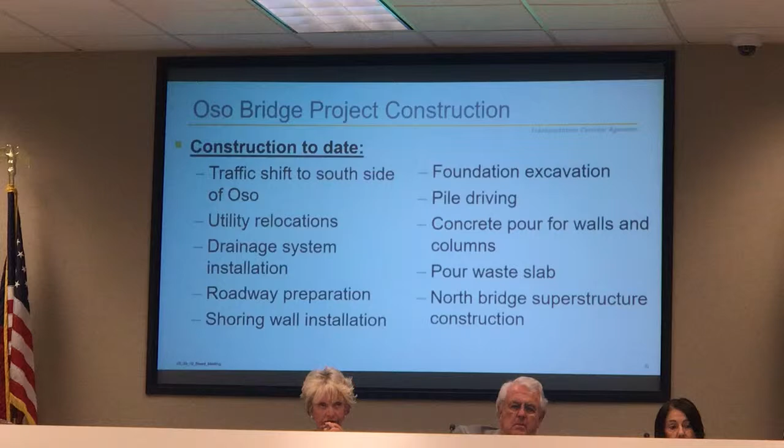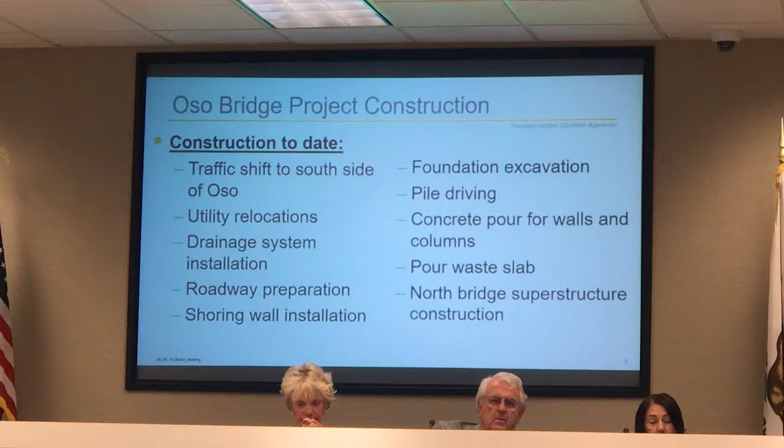Construction of the Oso Bridge project began August 1st, 2018. Since the August start date, 160 working days have transpired, resulting in 40% of the project being completed. Even though there have been 23 unworkable days due to the heavy rains this winter, the project is still 12 days ahead of schedule. Now let's look at some of the construction activities that have occurred to date.

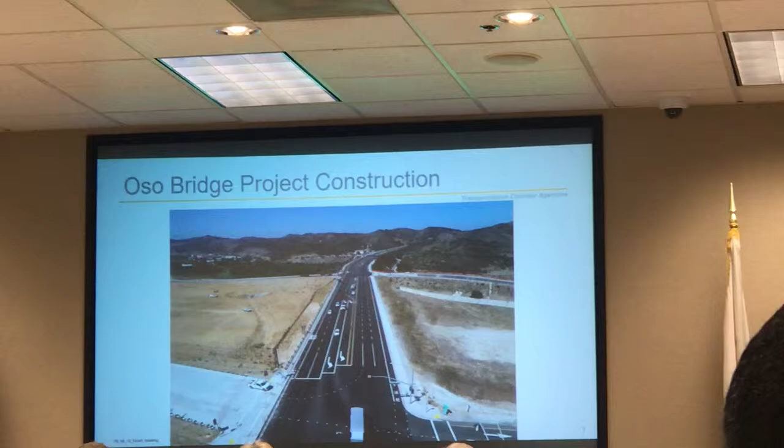The first order of business when we started this project was getting the traffic shifted to the south side of Oso Parkway. This is a view of Oso looking to the west before construction began. Look at that south side, or basically the left side of the slide, to see what occurred here.

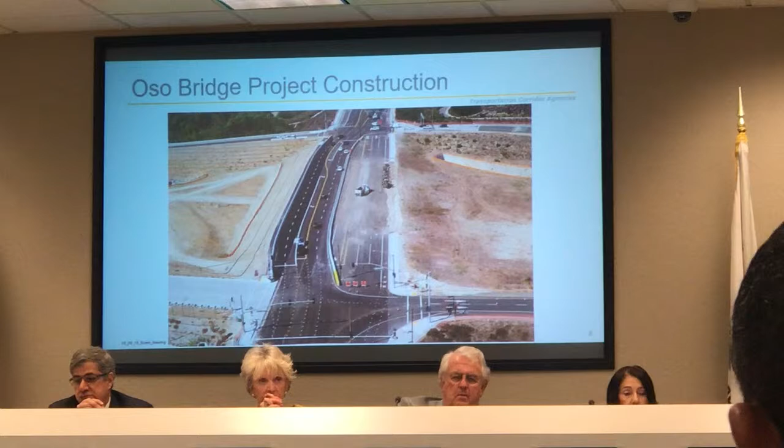To allow the traffic to be shifted, you can see where my arrow is here. Additional fill was placed on this side of the road, which allowed for 2 more lanes to be constructed on the south side. That allowed for all the traffic that was on the north side to be put on the south side here, which then provides the area to build the first half of the bridge on the north side.

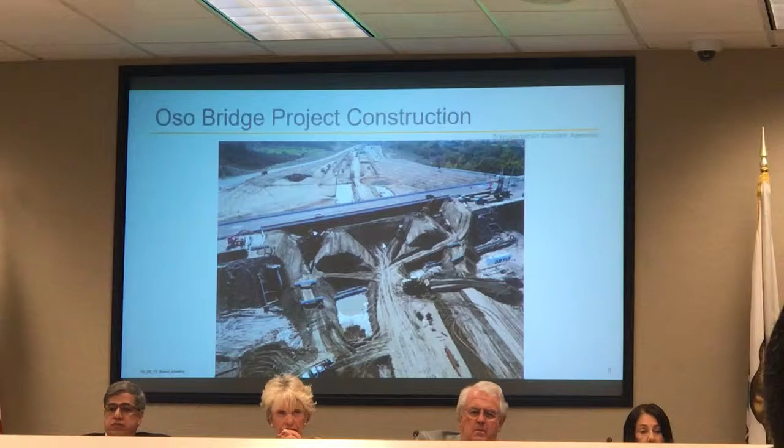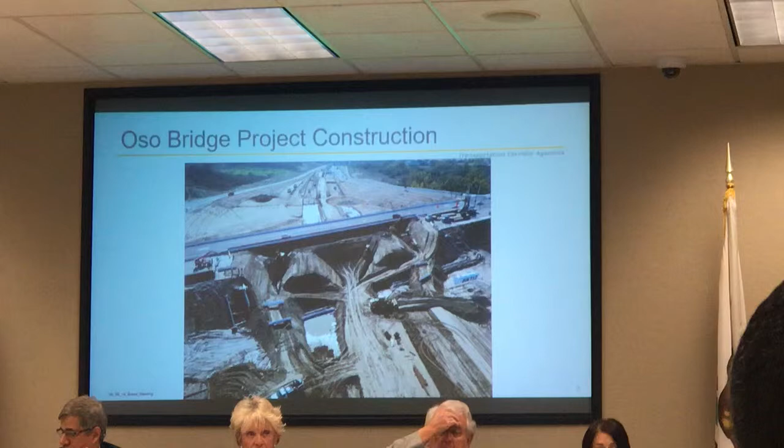The next thing that was done is the drainage systems were installed and utility relocations were placed. There were SMWD water lines that ran through this area. You can see here they have been relocated to the north, outside of the footprint of where the construction of the North Bridge will be.

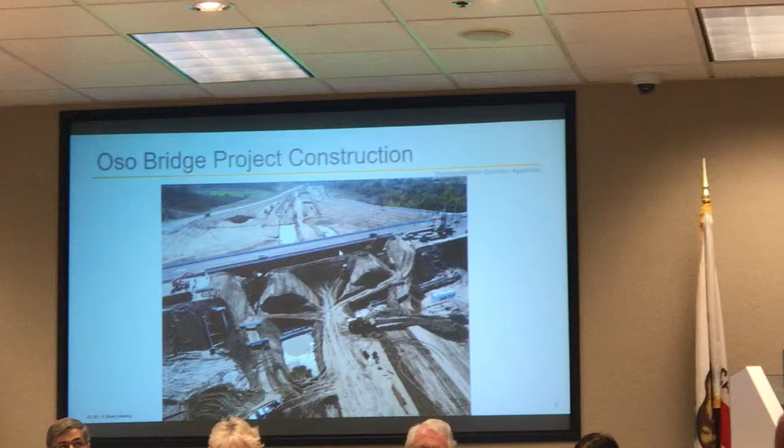Other utilities, such as the 8-inch gas line and the roadway, are protected in place by this soil nail shoring wall. You can see this is this black area here. And in the next slide, you can see how much deeper it gets here.

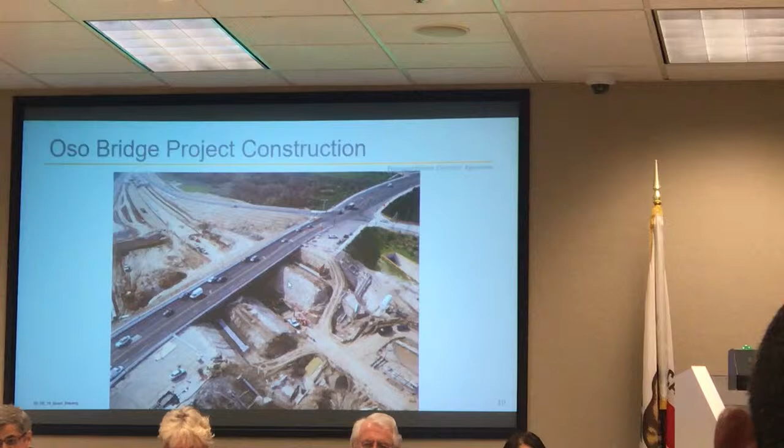This wall is put in place to protect the gas line and the traffic there. As this excavation gets deeper to put in the foundations, that shoring wall is as much as 18 feet deep, which allows for this area to be opened up and piles installed. At the abutments and at the middle column supports, steel piles were driven 60 to 80 feet into the ground, which will support the superstructure.

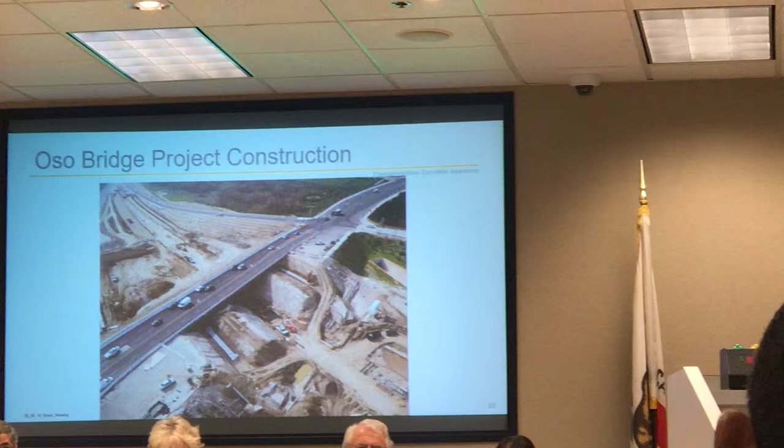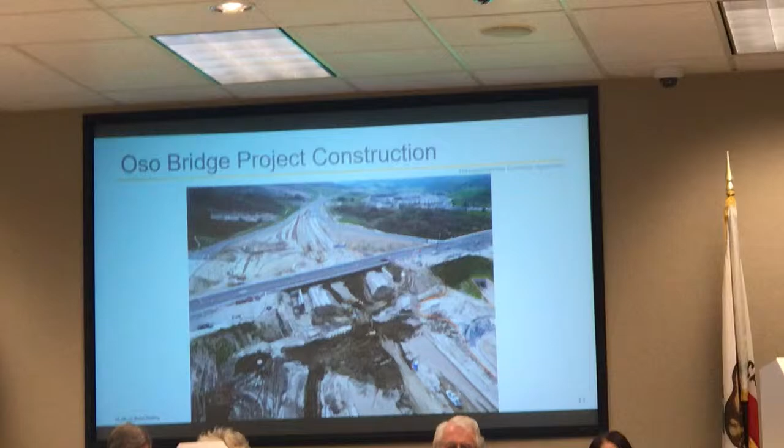The next thing that occurs is, once those abutment walls are poured, we now see the abutment wall, and you can barely see it, but these are the two columns that will support the middle of the bridge and the abutment. Once those have been installed, this area is backfilled with dirt again. You might think that's a little strange, why are we backfilling this if it's gonna be a bridge? It's because the actual superstructure of the bridge is gonna be built on that dirt.

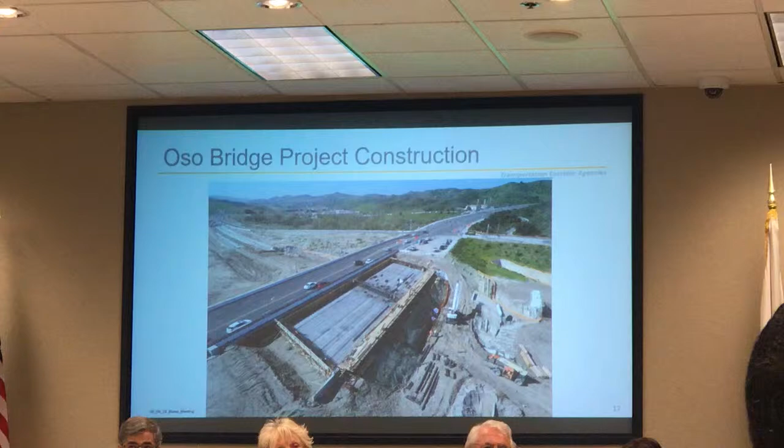The next thing that happens is what's known as a waste slab is poured on top of that newly placed dirt. It's called that because it's only temporarily there, and it creates a nice flat foundation area for the superstructure to be constructed on top of. We'll see that in the next picture.

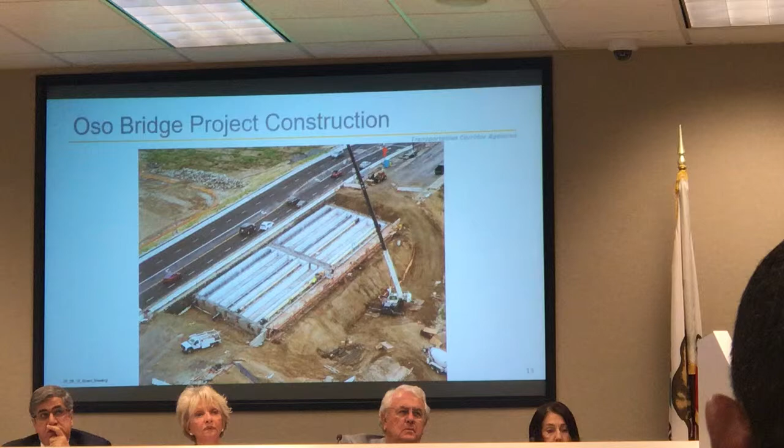Where we're at today, this was taken about a week ago, and this is really starting to look like a bridge now. We see the bottom of the bridge has been poured, which is known as the soffit, and you can see the stem walls separating the open cells within the bridge. A lot of people think bridges are complete solid concrete, and they're not. They're open cells, and within these open cells is where you see the utilities go.

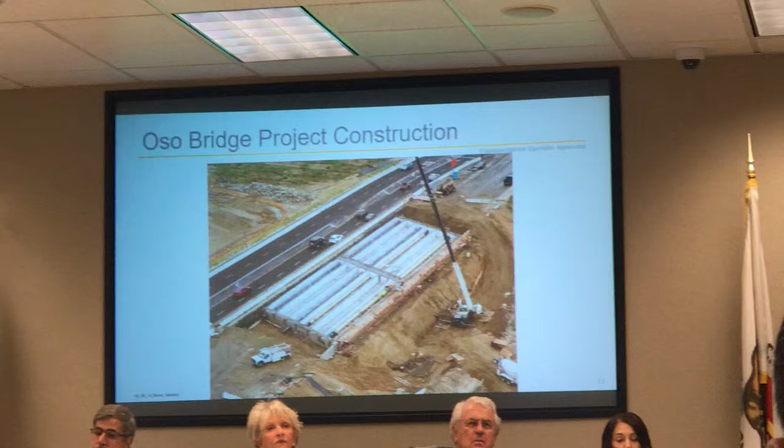So here's where that new SMWD lines are gonna be. They're the ones in yellow here, the two SMWD lines, the new gas line, and you'll see the new conduits for the electrical lines and the cable have been placed here.

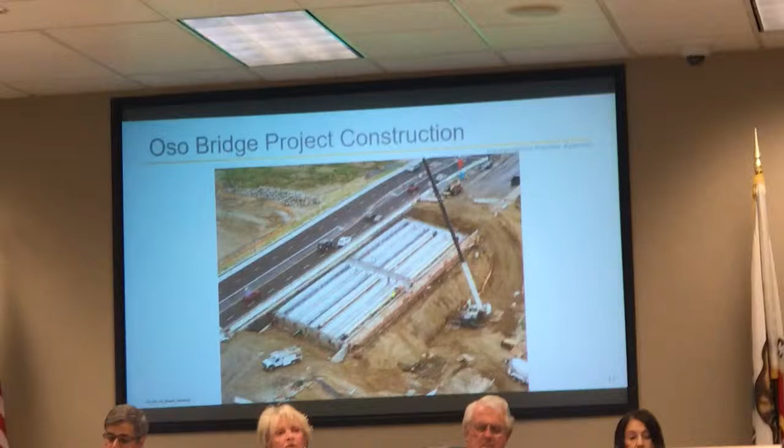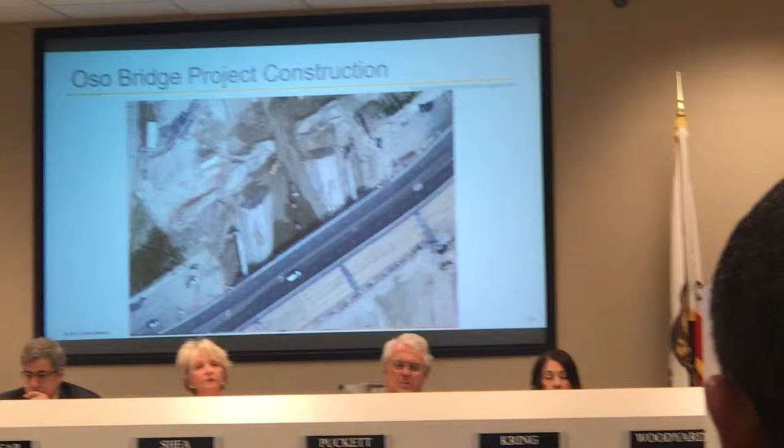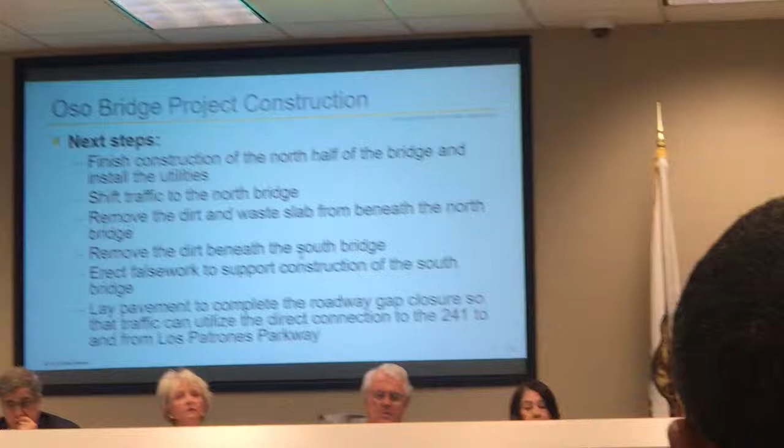So what's happened since August is we've kind of gone from the way it was here, we shifted the traffic. You see the foundations have been dug, and now that waste slab has been poured for the superstructure, which we're building right now. Now the next steps to occur, I'm gonna show you an overhead video of the area, and I'll go through the next steps here.

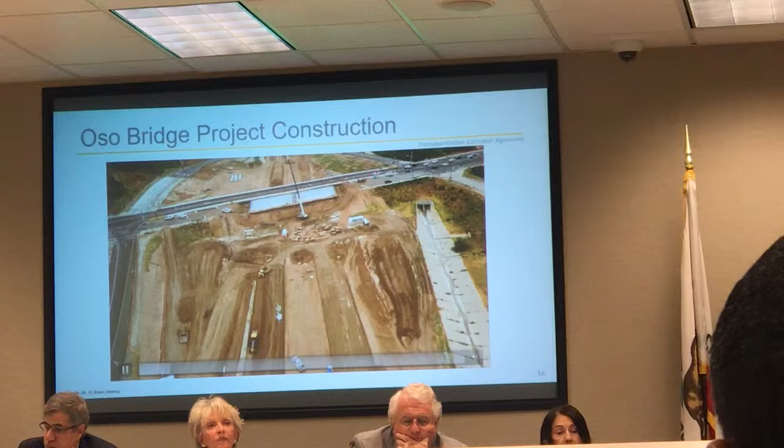You can see here we're getting ready, the subgrade's placed, you can see where the two new lanes are gonna be placed here and here, and we see where the construction of the bridge is.

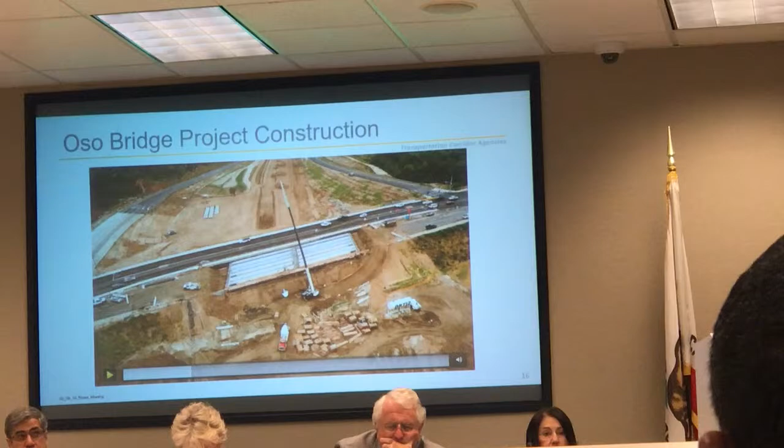I'm gonna stop the video right here to talk about this for a second. Once the superstructure is completed on this bridge, and now you get the feeling on why it's called a waste slab, this area will be excavated out below this bridge. That slab that was poured just kind of goes away, and the bridge now supports itself.

Then the traffic on the south side here will be all transferred to this newly built north bridge. So that frees up the south area to be constructed. Then this will be excavated out down to that same elevation.

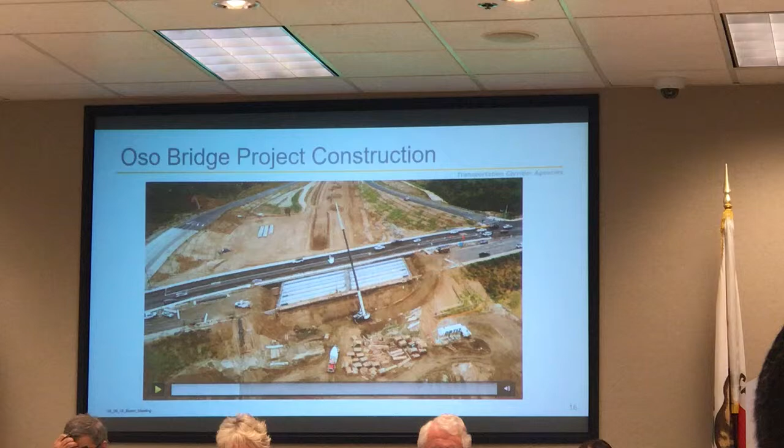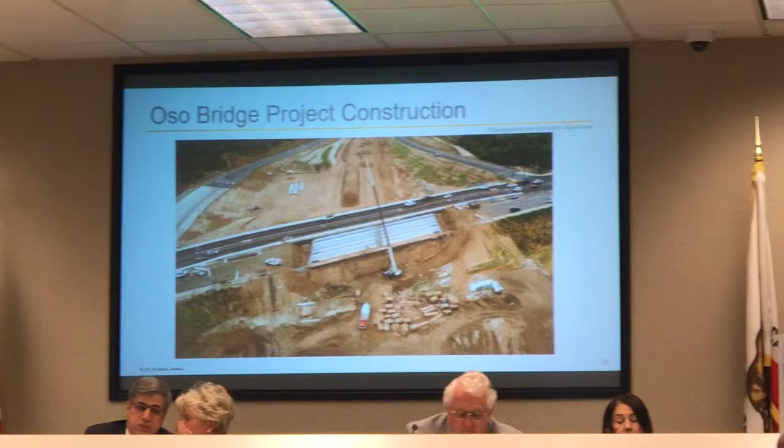Now the thing that's different with this bridge is it will be built on what's known as falsework. Falsework is what looks like scaffolding when you're building a bridge. That's going to be put on falsework because the north bridge will be open, allowing traffic to flow under there. So we'll be able to get traffic flowing onto the 241 before the project's even completed.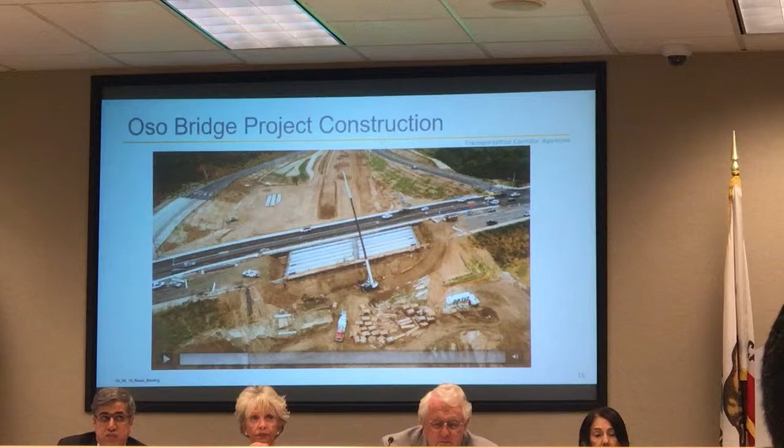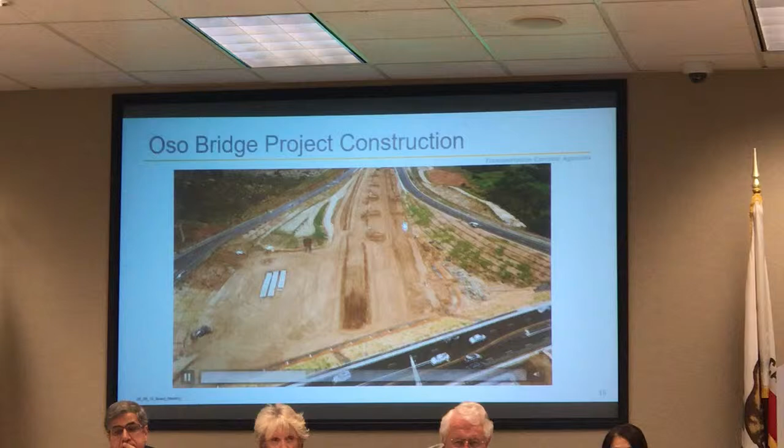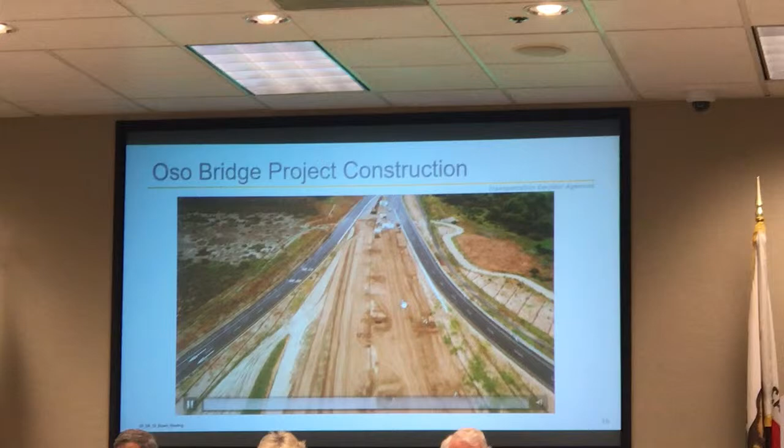Once that's done and opened up, we will complete construction of the south half of the bridge. This will already be paved as we're going south along here. We'll have all the drainage features put in, and here you'll see where this road will merge right into the existing Los Patrones Parkway, as the southbound lanes merge in and go on to Los Patrones, and the northbound lanes come off of Los Patrones and go on to the 241.

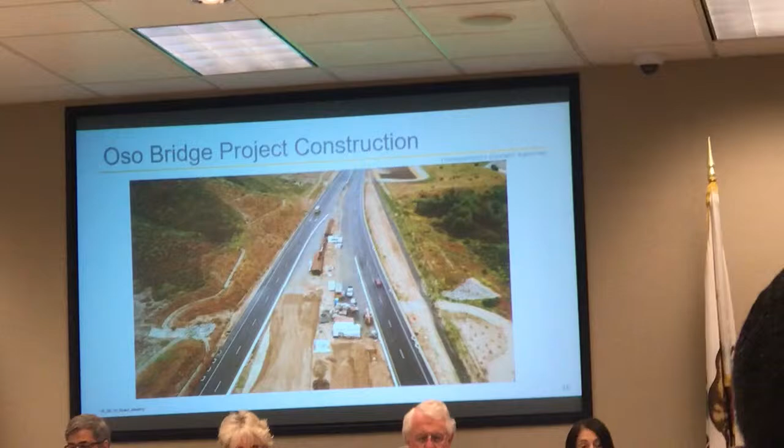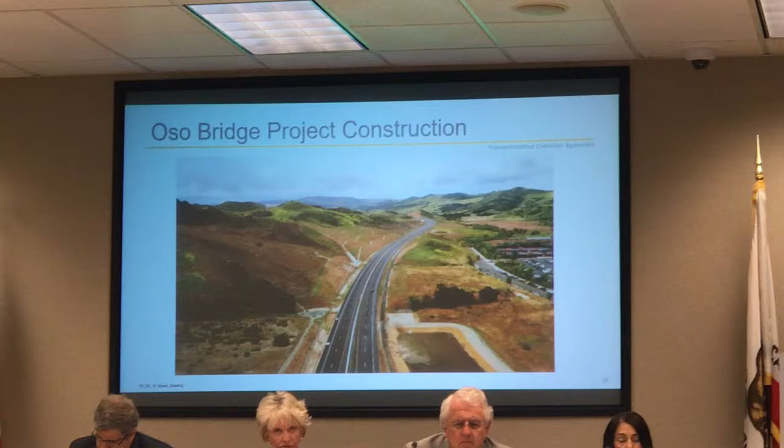This project is anticipated to be completed in summer 2020. Once completed, traffic will be able to go, as this pans up, from 4.5 miles south of here at Cow Camp Road, traffic will be able to get on at that location on Los Patrones, which was built as a transportation corridor. There are no lights on it. You'll be able to go to that point all the way up to the 91 freeway without ever encountering a light by taking the toll road.

So that's a wrap up on the Oso Bridge project. I'll take any questions if anyone has any.

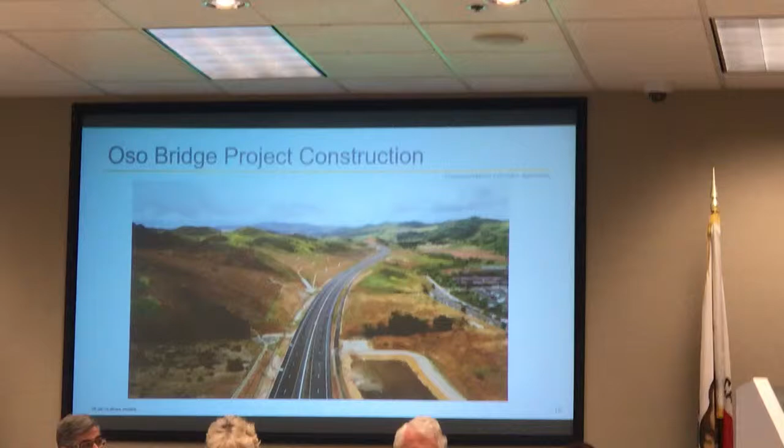Yes, Director Kelly. Yes, thank you. This is right outside of the Mission Viejo border, so we're real interested in this. First of all, two questions. It looks like you have really planned this well so that traffic has been minimally disrupted. Have we received complaints from Coto residents or Las Flores residents who maybe travel that road quite a bit?

We have received some complaints, but most were focused at the very beginning of the project when traffic was shifted to the south. There was some driver confusion, because someone who's driven out there for 15 years is used to making a left turn after maybe one second. Now it took a little longer to make the turn, so there was some hesitation and we received complaints on that. We added some additional signage to slow down the traffic, and we've received very minimal complaints since then.

Okay thanks, actually I have two more. Sure, go right ahead. Will there be a net increase in lanes on that section of Oso? It'll be the same as it was before, with 3 lanes in each direction and turning pockets.

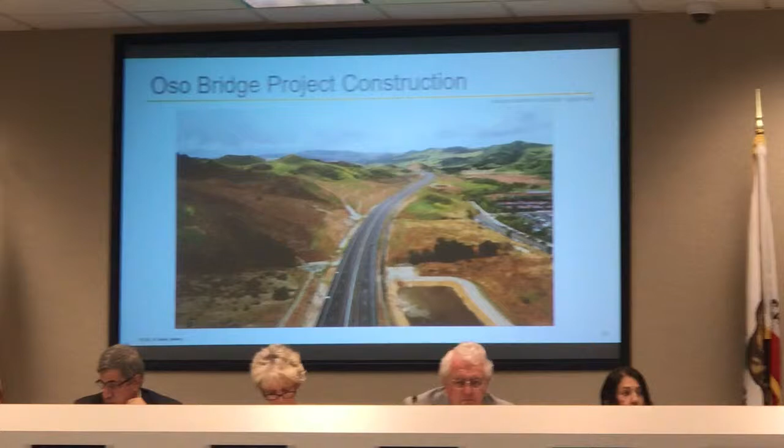Sure, and then final question, have there been any safety issues with Tesoro High School being so close by? Have not heard of any Tesoro High School safety issues.

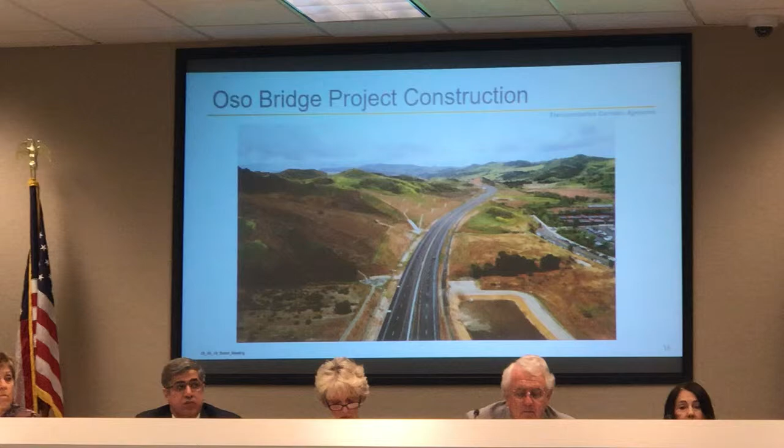Okay thank you. And in fact, if I can comment on one thing, that bridge allows, presently out there today, the pedestrians accessing Tesoro High School have only access on one side of Oso Parkway. With construction of the bridge, we provide pedestrian access on both sides. That's huge, that is huge. Thank you for adding that, thanks.

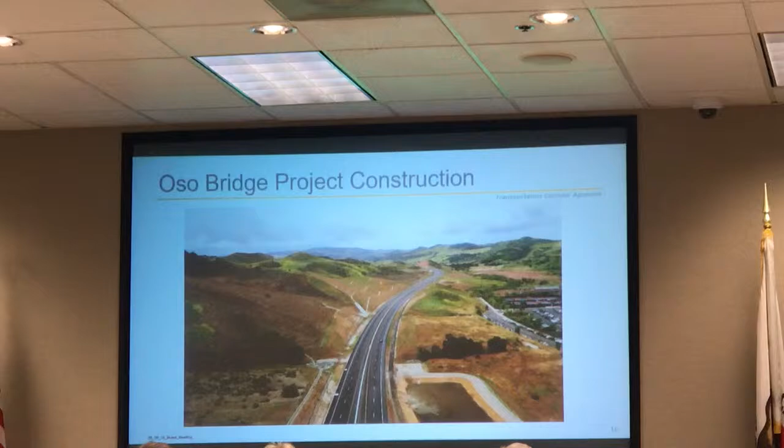I just wanted to express our appreciation to the county and the partnership that we have with the county, and to our partner Caltrans, specifically Shane Silsby and Khalid Bosma. The work that they've done to work with us on this project has been outstanding, and it's a great example of a partnership, as Paul said. Thank you. Great, thank you so much.